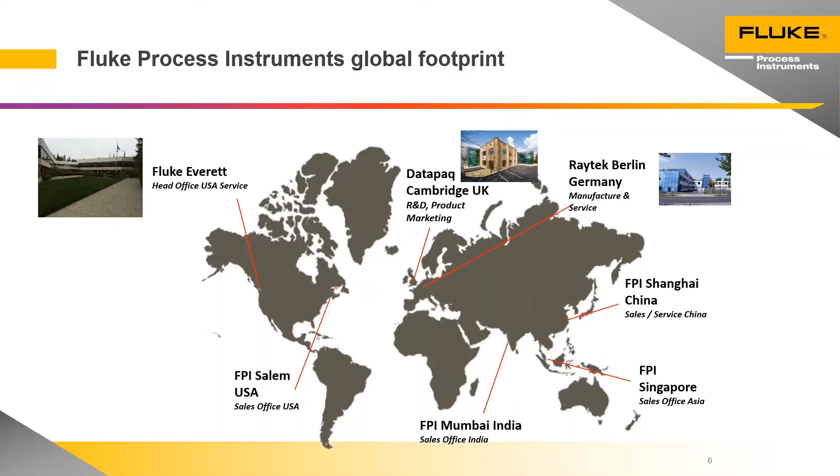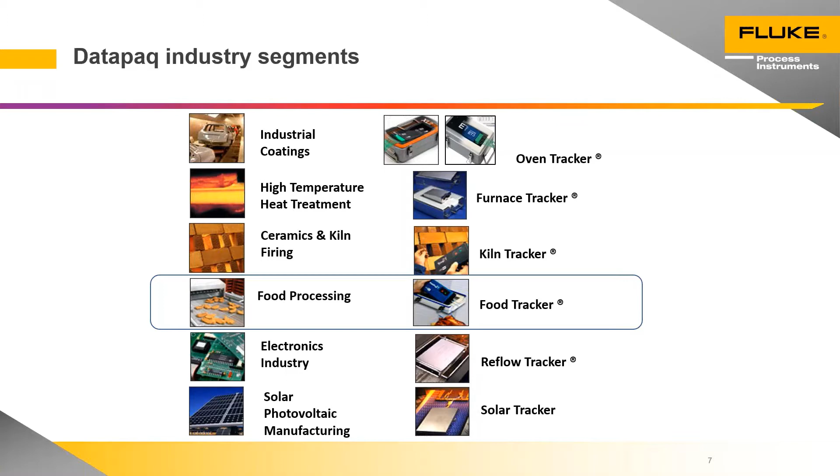Datapaq divides the world's thermal processing industry into different segments. The one we're interested in today is food processing. As I said earlier, the applications within food processing are fairly diverse compared to other industries. For example, in the electronics, we're always just heating things up in air and going to less than 300 degrees. In food, we have these different considerations of steam injection, oil cooking, and air cooking.

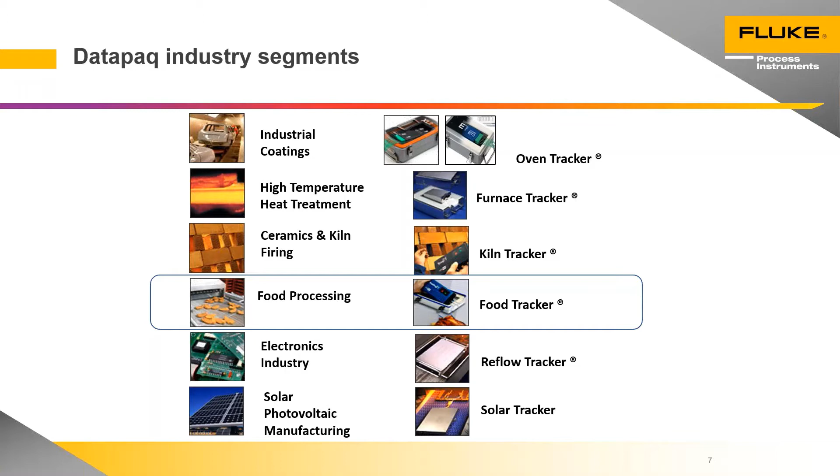In my experience, the profilers are used to improve product quality and to reduce the time taken when setting up cookers or processes and to increase yields. They're predominantly used in cook chill, so ready meals, baking, pastries and breads, and meat and poultry cooking, where the lethality calculations and chill down times are very important in maintaining food safety.

All of the ovens in which the profiling systems are used have control thermocouples measuring air temperature and possibly humidity in the heated zones, but that really doesn't give the full picture. Because of the variability in the food product, using a profiler is really the best and many times the only way of measuring the core temperature of the product as it goes through the process. And this is particularly useful when you're looking to validate processes and working within the HACCP protocols.

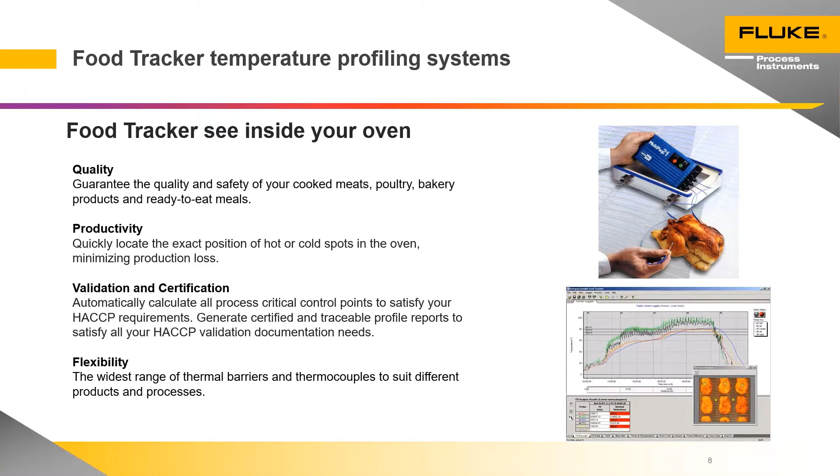Okay, that gets the general introduction, if you like, completed. And if we drill down in a little bit more detail on the data logger, this is the heart of the food tracker system. And the Multipaq21 data logger was designed specifically for this process. We didn't repurpose one of the data loggers that we use in the other industries. This was designed from day one to be used in the food industry. It's unique amongst our products in that it operates from -40 centigrade all the way through to 85 without any thermal protection at those temperatures. And the calibration is guaranteed over that range.

It's fully sealed to IP67, and that includes the battery compartment. So there's a sealed nickel metal hydride rechargeable battery within this unit. A typical user life for that's going to be 3 years. And it will have to come back to the service centres at the end of that time when the battery needs replacing.

Thermocouple connectors are designed by us specifically for use with this data logger in the food industry. They provide a fully sealed connection. A standard thermocouple connector, as you know, is open to the elements. It will work 1 or 2 times going through a food process, but within time, the sockets get filled with grease and contaminants, which affects the readings. So we've gone for a fully sealed version here.

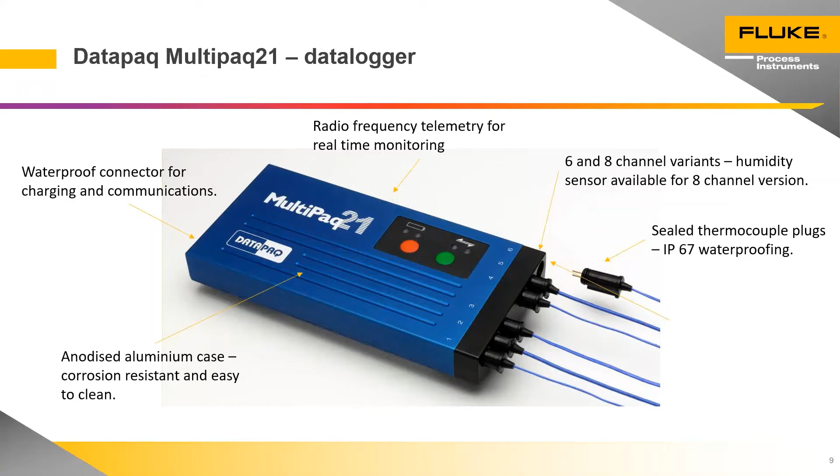Moving on from the data logger, 2 or 3 slides now just on thermocouples. The task in the food industry is a little more of a challenge when it comes to sensors than in some of the other industries we serve. If you imagine the luxury of connecting a thermocouple to a piece of metal is that you can bolt it on, screw it on, weld it on, make a really good connection to the product on either the surface or the core temperatures, and it's very easy.

And all of the thermocouples that we sell conform to the special limits of error, which for a type T thermocouple is plus or minus 0.5 degree C, or 0.4% of the reading. So all the way up to sterilization temperatures, around 120, 125 degrees, your accuracy is going to be the plus or minus 0.5. As you go above that, the 0.4% of reading becomes more dominant.

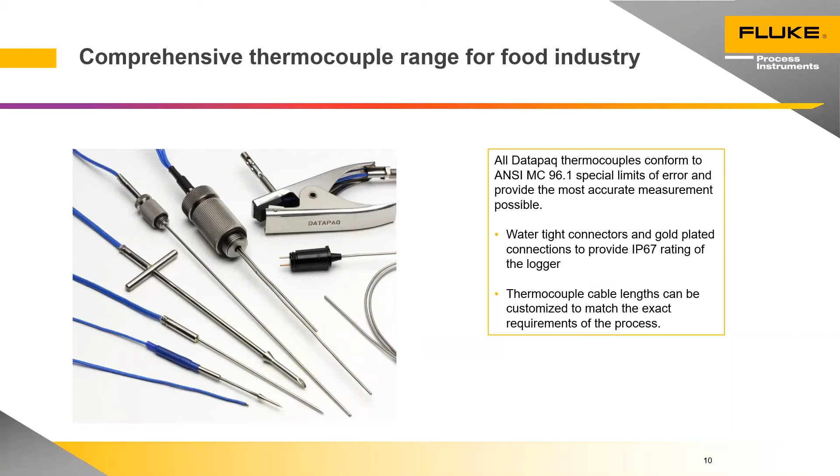So here's a close-up on some of the thermocouples you just saw. If I start in the top left, this is a mineral insulated, which is what the MI stands for in this case, a mineral insulated needle probe. Used extensively. It has a unique feature among the thermocouples on this page in that it can be used at temperatures all the way up to 400 centigrade, type T thermocouple. All of the others are limited to 265 by the PTFE used on the insulation. So this is our high temperature food thermocouple.

The downside of that is it's less flexible. It's a steel outer or metal outer sheath with the thermocouple wires embedded within it. So it finds application generally in high temperature, large food items, used in baking of pizzas, bread baking, that sort of application.

Next down, we come to what we call the standard needle probe. I guess it's fairly obvious what this one does. It's for inserting into food products. The advice I give here is to ensure that this is used in products where most of the needle, if not all of it, can be inserted into the product.

If you were to use this in a very small product, such as a chicken nugget, and you have a substantial portion of the thermocouple outside of the product, you're going to get what we call stem conduction. The thermocouple itself becomes heated. It will conduct that energy along the thermocouple into the product. What you measure then is a mixture of the conduction along the thermocouple and the product temperature, which is not what you want. So really match the size of the thermocouple to the product being measured.

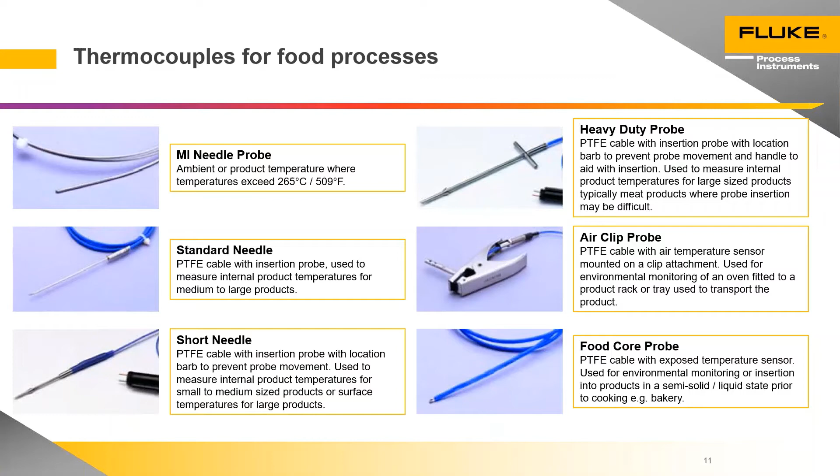The humidity sensor I talked about very briefly when I introduced the data logger. This is an option and allows you to measure relative humidity through the process and display it as a third axis on the time and temperature graphs. So we have a time, temperature, humidity graph. And this really is beneficial. And I've seen it used a number of times to control the steam injection in a process, improving moisture retention

and increasing product yields. Most of these ovens or processes where we have humidity control will have 1 or 2 sensors maximum. And it really doesn't give you an indication of what's happening where in the process. Having that measurement of relative humidity from start to finish really does enable you to optimize the process with no risk. It's also used in the baking industry in the control of crust formation with the moisture condensing on the product.

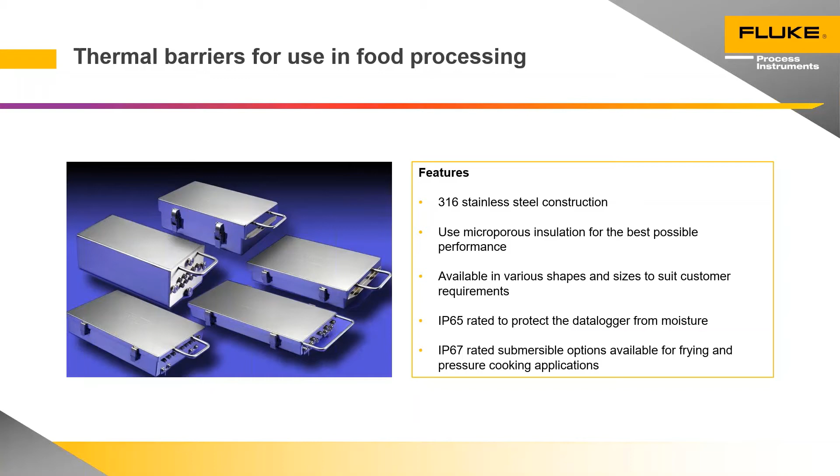There's a couple of accessories here I wanted to point out just to make life a little bit easier. Profiling in food processes is quite tricky in that if you imagine the case at the top here in this first picture, I have a thermal barrier. I'm going to connect 6 thermocouples to small food portions and place them across the width of my conveyor. To walk up to a moving conveyor with a thermal barrier in one hand and those 6 or 7 products in the other hand is very difficult. No doubt some of them will fall off the end of the thermocouples before you get there.

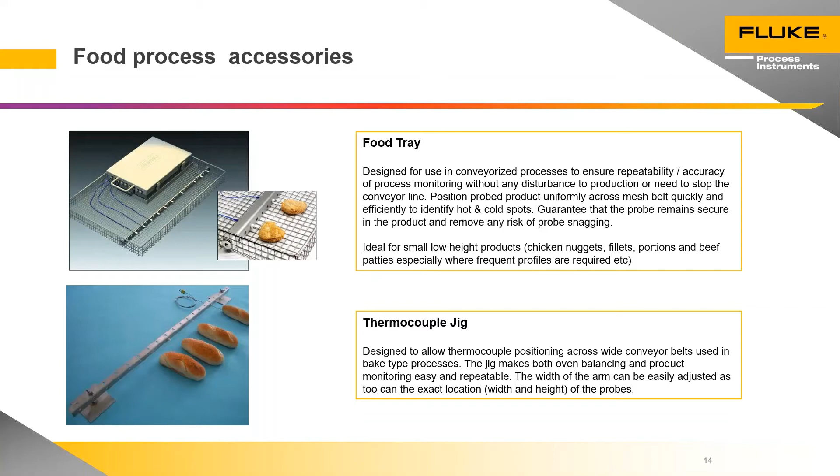But where we've got batch or semi-batch processes with large racks, maybe rotating inside the oven, then it's really useful. Because what we can do now is place the entire profiling system on the rotating rack. We can measure the product's top, middle, bottom, and we can have that data in real time coming out to the PC screen, so that as soon as the cook criteria has been met, you can make the decision to finish the batch and move on to the next one. So it really does help to have that real-time information in optimizing those batch cooking processes.

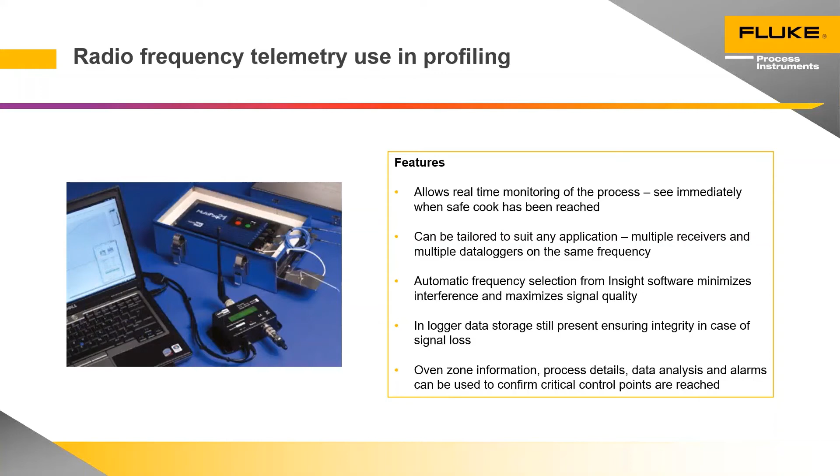So we looked at the data logger, selection of thermocouples, how we protect the data logger, and maybe getting some real-time information. It all comes back to the software. The software is the part where we turn the raw data into some meaningful information that you can base decisions on. We like to think it's easy to use, and we use it daily, so for us it is easy to use. But for infrequent users and novices, everything I cover today can be accomplished using the wizards in the software. They step you through the process, just ensuring that every step is completed before you move on to the next one.

With the added advantage that once you're inside the wizard, if you click on the help button, the help will be context sensitive, meaning you will get help on the step you're currently doing. So I do advise infrequent users, use the wizards.

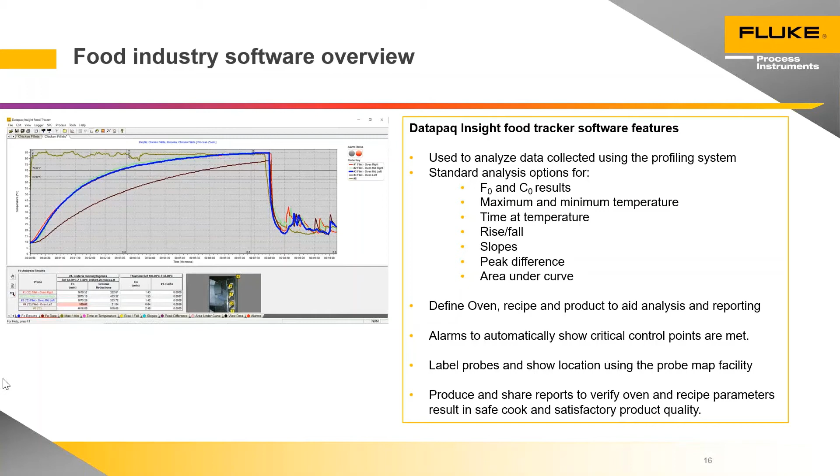I talked about rotating racks, and just one example of how the software makes life easier for you. In the process file, you can have a photograph of the rack. You can build that into the software. It gets printed on all the reports. You can drag the thermocouples into position, so it looks really nice.

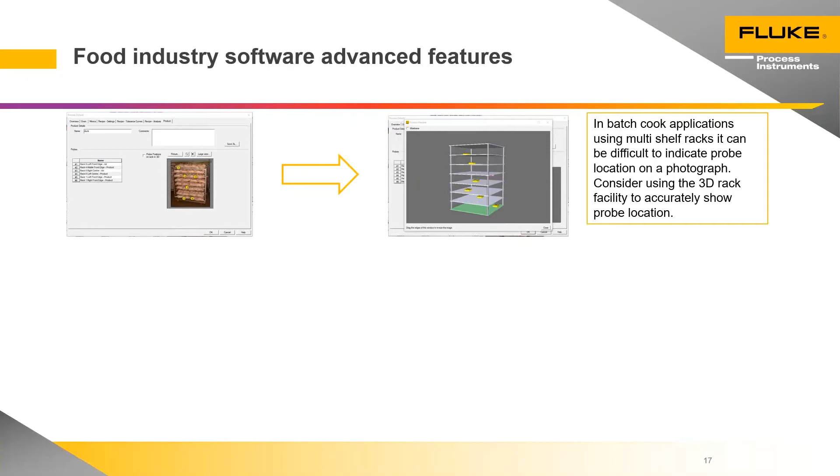On the rack, you don't really get the detail in terms of depth. So if you've got a thermocouple at the back and another one at the front, that's very difficult to show on a simple photograph. So there is the ability to create these kind of wireframe images that you see on the right-hand side there. And then you can place the thermocouples really precisely onto each level within the racking system, but also front and back and middle. So, you know, do consider that when you're using the system.

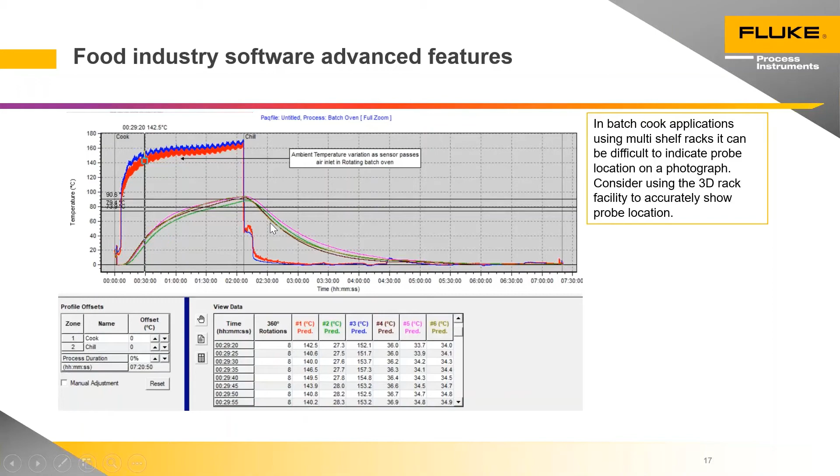And once a first profile has been taken and you've done a numerical analysis, for example, in this case, a lethality calculation or maybe a time over temperature measurement, this allows you to increase or decrease the temperature profile in steps of 1 degree and see the effect that that change has on your calculated results. It's not predicting the changes you need to make to the oven. This is just saying, if you increase the profile temperature by 3 or 4 degrees, this is what will happen to your lethality. It's then up to the food technologist, the process manager, to make the changes on the oven that will achieve that increase in process temperature. So it's helpful. It's not going to tell you what change you need to make on the oven. That's up to the operator, the process manager, to decide.

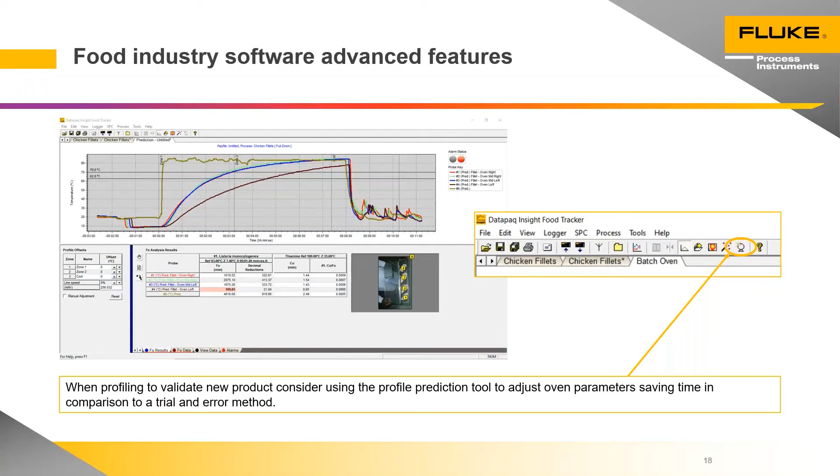Finally, a few slides on lethality calculations. I've mentioned more than once that you can do these within the software, and I think some of the slides up till now have shown images with a lethality calculation on there. The real benefit in doing lethality calculations based on thermal profile information is that you're doing it based on the profile throughout the oven. So you get that contribution to the bug kill for the full process.

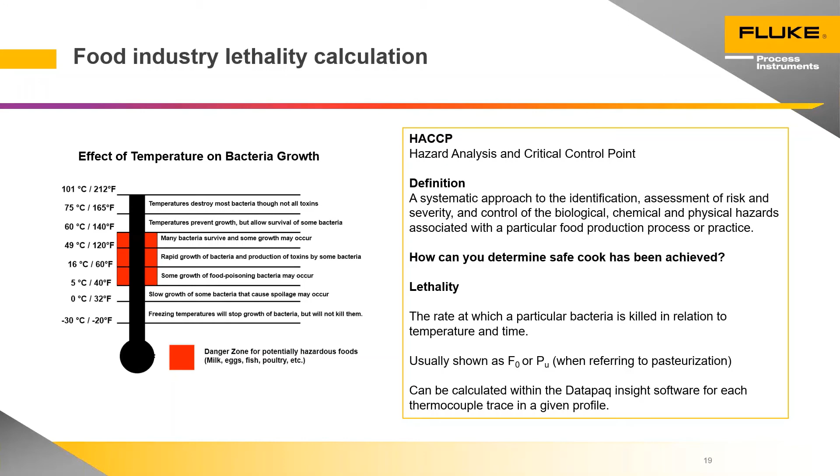In the hands of a food technologist, this is a really powerful tool. It can be used to optimize processes while ensuring food safety. All of the results that we get can be printed out. There's actually a specialized food lethality report that comes out of this Insight software. I'll show you an example of that.

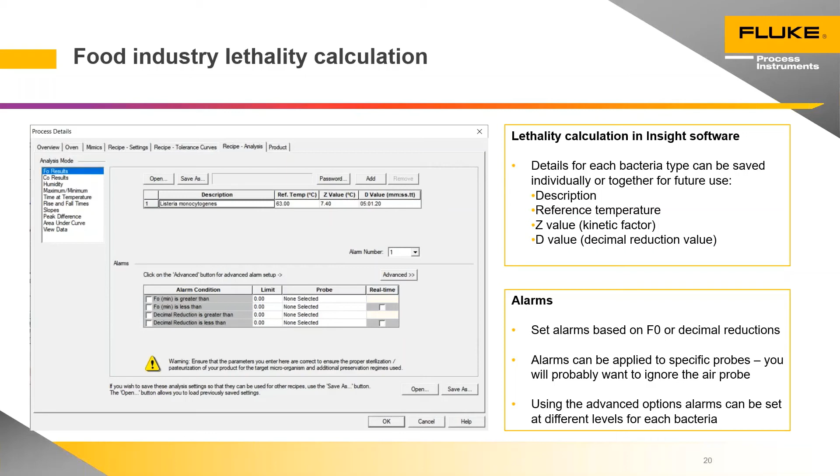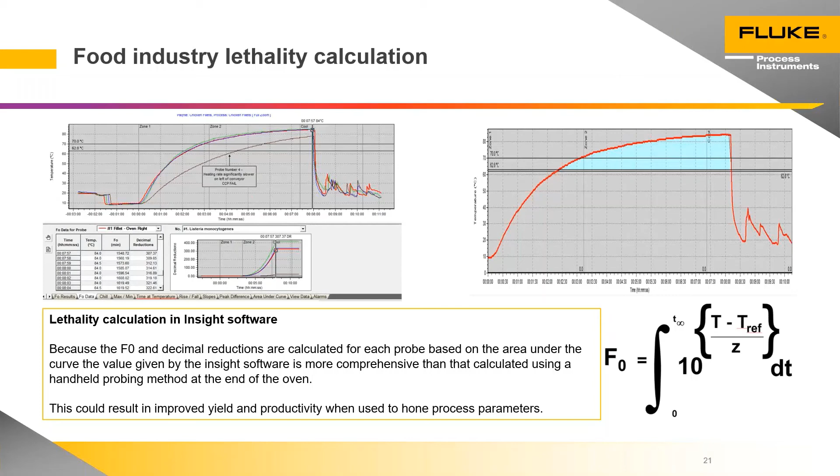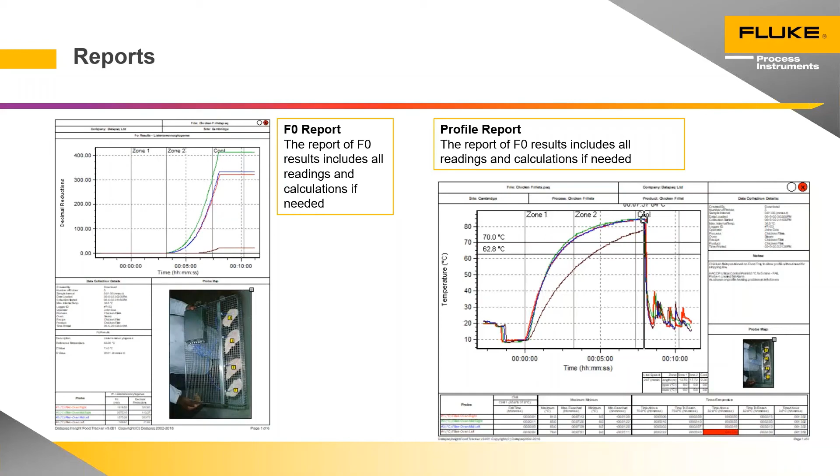Okay, I think that brings me to the end of this presentation. We skipped through very quickly what is, in fact, a very in-depth subject. So I hope there's something in there that's pricked your imagination, and hopefully there's some questions coming in on some of the points we raised. Thank you for your attention.

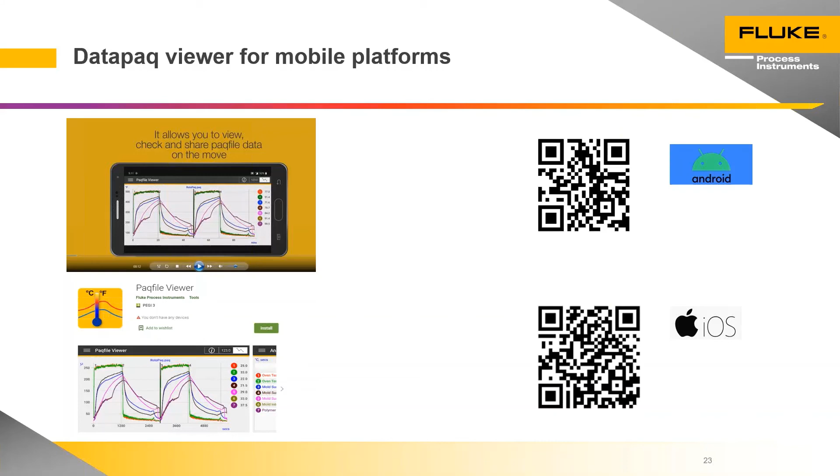Thank you very much, Rob. That was a very good and interesting presentation. Food's a very complicated subject, and you covered it very well. So we have had a couple of questions come in.

First one here is, how long does the thermal barrier last in the frying process? Okay. Well, the first thing to point out is the thermal duration of a thermal barrier is related to its size. There's a specification given for each thermal barrier. Those that are used in frying processes, the thermal duration will be halved compared to its duration in the air. So typically, it's better to come to us with the exact process details, and then we can suggest which barrier is optimum for the process. But yeah, the duration is reduced when used in oil as opposed to air.

And can we rewire the thermocouple connectors for the food probes? Yeah, good question. Where possible, all of our profiling systems use standard thermocouple connectors, but in this industry, it's really not possible to get a good seal on a standard thermocouple connector. So we use those sealed versions that you saw earlier. The connections in those are crimped and the connectors are sealed, so it's generally not possible. It's not recommended because reworking those connectors will impact on the sealing. So we would recommend they get replaced at that stage rather than reworked. Very good.